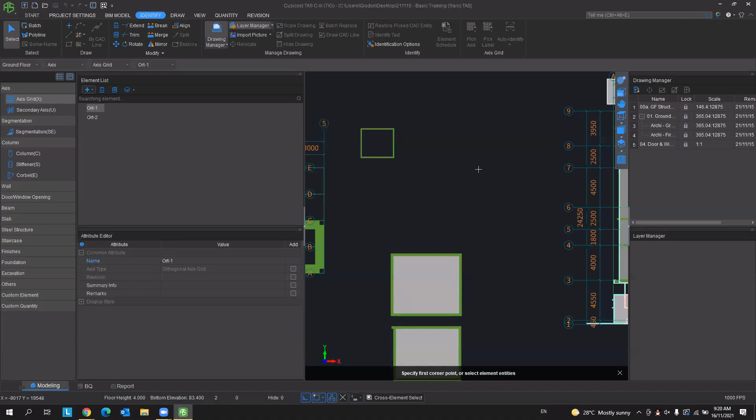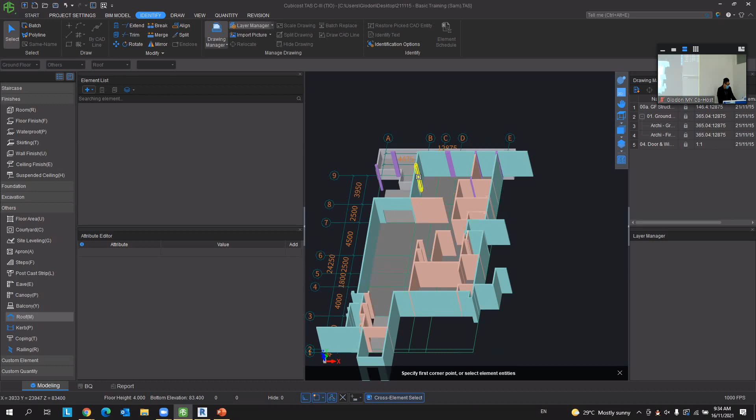So the next item we are going to talk about is our finishes. We're going to talk about finishes, right? So I would like to let you guys know, before that, let me resume the recording.

Recording in progress. So for the finishes from the element tab here, it's actually falls under finishes element. So in the finishes element, you will see there are a few things.

Okay, the first one will be on room. There are some finishes: skirting, wall finishes, floor finishes, and ceiling finishes. I'm going to explain the differences and what we can actually do with them. For the room finishes, I'm going to leave that to the last.

For the floor finishes, you are able to create a horizontal and also a vertical floor finish. For example, something in the toilet, nearby the toilet, we have a drop at the toilet. So this is our vertical finish, and this is our horizontal floor finish. We can actually generate both.

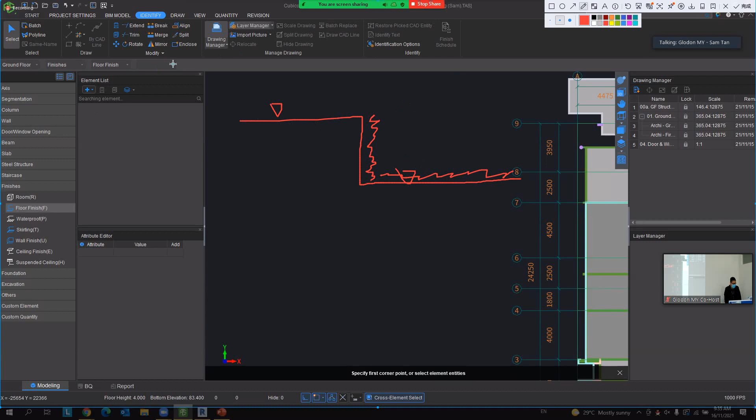For the waterproofing, it's the same case—horizontal waterproofing and also vertical waterproofing. Skirting will be on the skirting only. Wall finishes, also the same. Then we have ceiling finishes and suspended ceiling. Ceiling finishes will be the bare finishes, the finishes attached to the upper floor.

For example, this is the first floor, and this is my ground floor. The ceiling finishes will be the finishes on the upper floor's slab. For the suspended ceiling, it will be something like having a hanger to hang your plasterboard ceiling, for example.

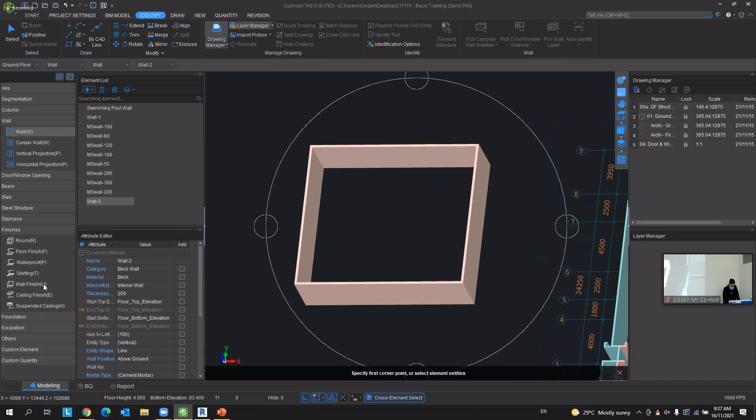So those are individual finishes that we can create and also point to that particular parent entity. For example, let me show you—say if I have a wall with four sides. If I'm using one by one, I create a new finish, for example, I create a plaster.

Don't need to follow me, just let me explain. You can actually create the wall finish, plastering, and then use the point function to point it at each side of the wall. So this is how we can point the finishes, but this is not flexible enough.

Normally we will receive some kind of finishes schedule. If you refer to the training material that I sent to you guys, you will have this Excel file. This Excel file, or even the data in the AutoCAD file or PDF, we can actually identify it. It will be a little bit similar to our door and window schedule.

We will need to identify all the information, and then they will create a room. So what does a room mean? For example, type A bedroom has floor finishes, wall finishes, ceiling finishes, and skirting—what are the finishes that we have for one particular room.

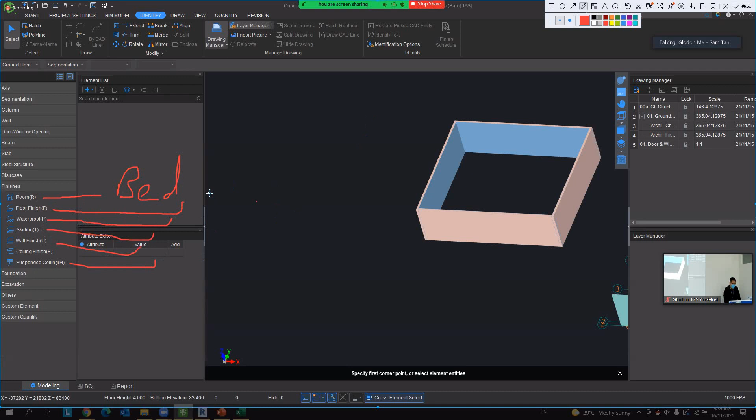Back to the software, in TAS software we actually read it as room. The principle is you're going to create a room, for example bedroom. For that bedroom, I'm going to assign what are the finishes—my floor finishes to the room, is there any waterproofing for that room, my skirting, my wall finishes, and my ceiling finishes. So I have one room associated with other finishes.

Then I'm going to use a point function to point it directly to the enclosed area. Remember, when we're using the point function, we're using enclosed area. So this is the principle of it—by one click, you click on the room within the enclosed area, and all the wall finishes, waterproofing, skirting, and ceiling finishes that we assign to the room will appear for that particular enclosed area.

So you can also do it the flexible way, which is you create the floor finish one by one, point it once, and then create wall finishes and point for four sides of the wall—that will be the manual part. So for today, let us focus on this.

Let us double click on the ARCHI ground floor plan on the drawing manager. The reason I want to call out my drawing is because I want to know what room name I have now. We're going to focus on one particular part, which is the top right hand side—just the wet kitchen, at the moment, for the top right hand side of the plan.

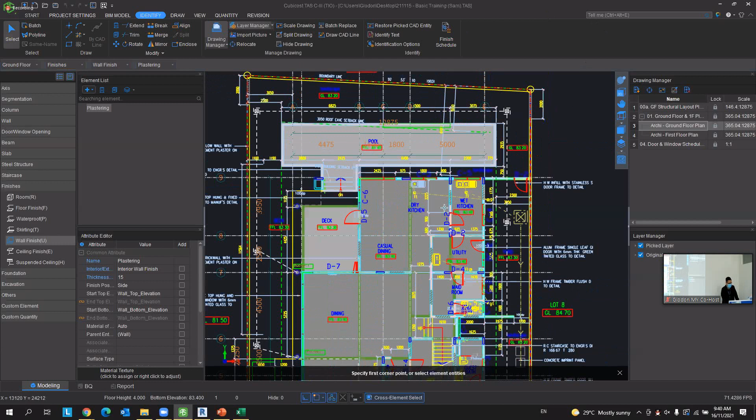Right, so here we go to the room. Okay, make sure we add the room.

Then you will see at the identify tab, I have a finish schedule, and at the draw tab, I also have a finish schedule. For the identify tab, everything is related to the drawing. If the information falls within the drawing, you can use this finish schedule, because if I click on it, it will ask me to select the finish schedule to identify. But currently my finish schedule is in Excel, so I'm not able to use this function.

I need to go to the draw tab, finish schedule. Once you click on it, there will be the identify finish schedule. From this path, you are also able to select your CAD data, but as we are having the data from Excel, I'm going to select import Excel file.

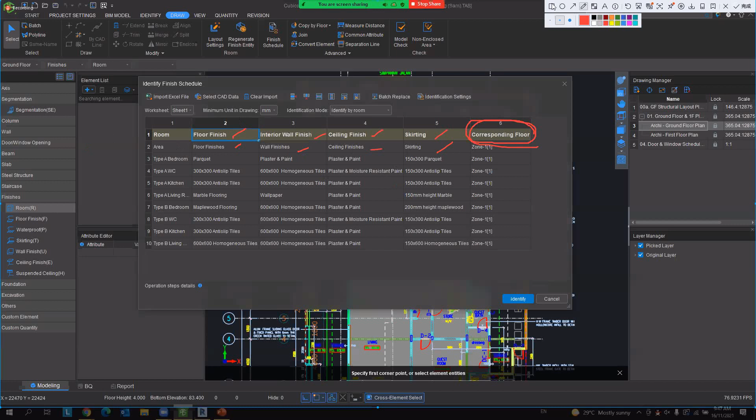Now I'm going to select row number two and delete it, since it's no longer applicable. I will highlight the whole row number two, then right click and delete the row.

So make sure the first row is actually our room, and then we will have a total of 8 rooms identified - we have type A and type B, total 8 rooms. Similar to before, after you click on identify, the 8 rooms will go to the element list.

So we try to click on identify. It will prompt stating that there are 8 rooms, 5 floor finishes, 5 skirting, 3 wall finishes, and 2 ceiling finishes identified. And you'll notice, in the element list, you already have the 8 numbers of the room element. I can just click OK, and I close this identify finish schedule tab.

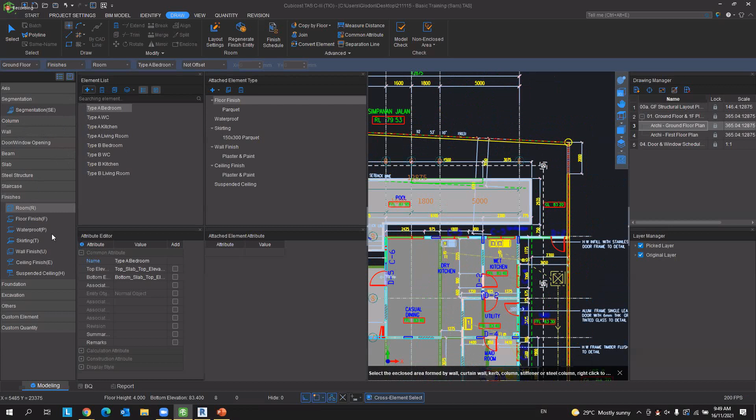Okay, so you already have your room. You will see for room finishes, comparing to yesterday our element. For common elements, for example column, beam, slab, wall, you only have element list and attribute editor. But for room, there will be a little bit more.

Comparing to the other elements, here's how you read it. You will have the element list for the room. Each of the room elements will have their own attribute editor, and also there will be the attached element type, meaning for this particular type A bedroom.

I will have one floor finishes parquet, I have my skirting parquet, I have my wall finishes, and I have my ceiling finishes, plaster and paint. So this is what we call an attached element type.

So all these attached element types will be automatically transmitted to the individual finishes - floor finishes, waterproofing, skirting. It will be automatically transmitted. Later we can actually open and see.

Then each of the finishes here have their own element attribute, the attached element attribute. So take for example, if I click on parquet, for this attached room, I'm having 15mm thickness, and the positioning is actually at the top of it, and the elevation.

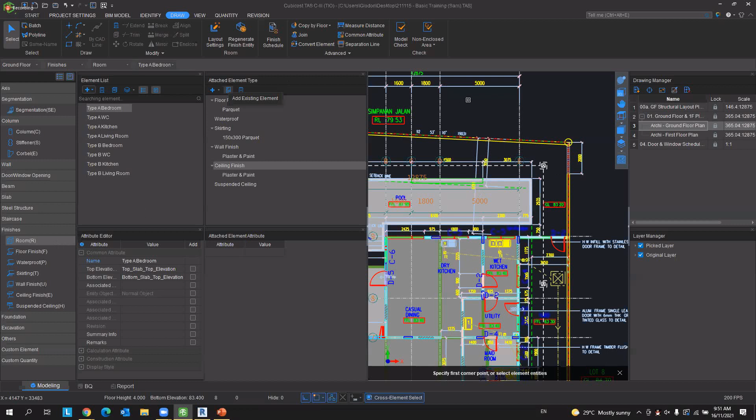Just below the swimming pool, at grid line DE, I'm actually having a wet kitchen. We focus on this wet kitchen. So for this wet kitchen, as we see from 3D, it will be only bare without the finishes currently.

So in this case, I'm going to locate from this room element which one is appropriate for this wet kitchen. From here, I can see you can actually use type A or type B kitchen. So I will need to select type A kitchen first, we click on it.

Then similar principle, you need to use the point function and you will need to select the enclosed area - the enclosed area formed by the wall or the enclosed area formed by the column, or curbs. So make sure I'm having this point function and I can point easily within the particular enclosed area. If you successfully point, you'll see the purple color.

Already, yes, you got it, Brian? Okay, sure. Right, so now I'm in my wet kitchen here. I choose for this type A kitchen, I click on the type A kitchen, then I want to point now. So I just hit the draw tab, this point function, and then you just point it.

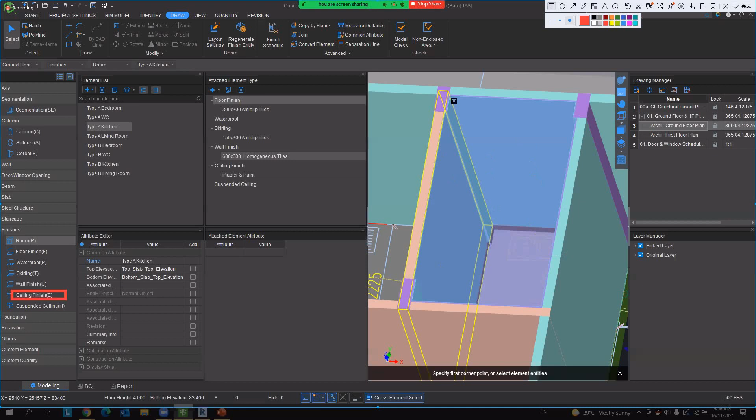Okay, so this is how we can actually point our finishes.

I would like you to focus on the skirting I'm having now. So from here, you were able to see by one click, you're able to get your floor finishes, your skirting, your wall finishes, and the ceiling finish that just now we hide by pressing E, right? One thing I would like you to focus on is the skirting.

So yesterday when I talked about the private and public attribute, for the private attribute, we will need to select the entity first, only then we can do the value adjusting. But in this case, if I'm selecting my skirting, it will be quite troublesome for me to need to select a whole room skirting.

Let's say currently my skirting, I want to change from 150 mm to 500 mm, for example. You can just focus on my screen here. So how can we actually do the changing for that?

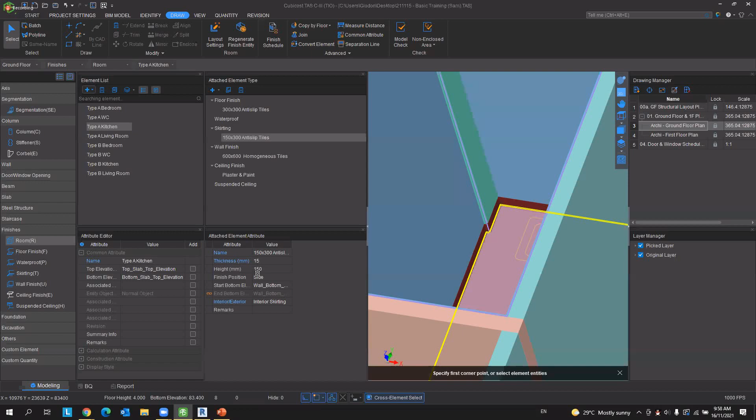So there is another scenario. If you can see from the model here, I'm actually having an opening here. This is the dining and also living. I'm assuming the dining and living share the same finishes, and I want that for the finishes.

So I want it to cover until this particular point, and not go beyond that. I don't want it to go to the casual dining, right? So let me try my luck.

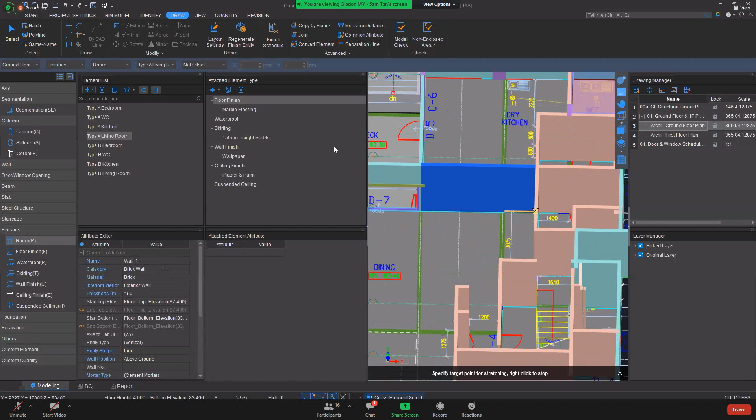So what we can do is use a function called separation line. A separation line is a virtual line, to form - it won't carry any value - it will be forming an enclosed area.

So let us try to draw a separation line here to form an enclosed area. I will just need to select the separation line, and then use line to draw out the straight line to cover it up. I don't need to draw for the whole stretch of it.

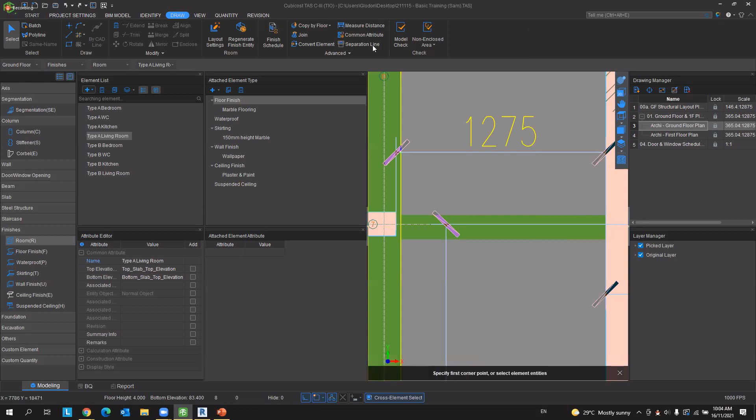Just beside this, click on this separation line here, and click to separation having 3 dots here. Anyone able to get the separation line? Yes.

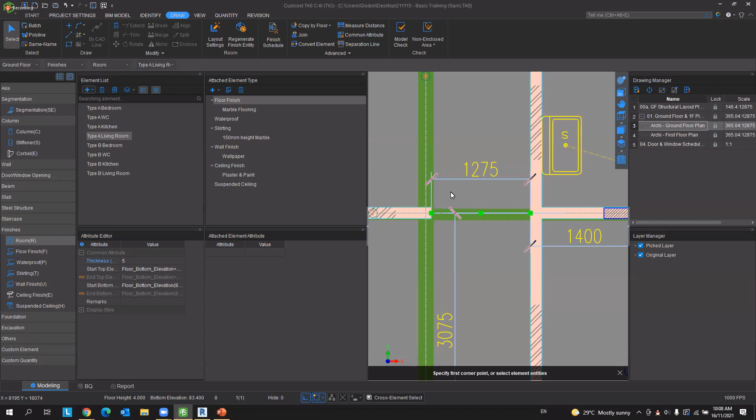Once you create the separation line, the next thing we can just click on the type, living room, click on point, and then you just point it, and then you see whether it is the thing that we want.

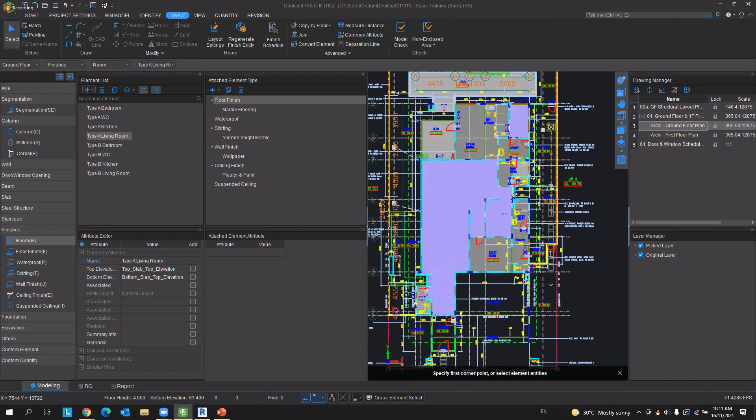External finishes, in fact we have so many walls for the external wall finishes. So we can actually close all the layers, it's actually confusing, right? So if you are doing it manually, you create the wall finishes and then you point it one by one, walls, also can be done.

But you can think out of the box, which is later I'm going to use back the same function, separation line, but I'm not going to use line. I'm going to use the rectangle function, and draw the whole separation line. Then I'm going to create a room for the external finishes, and use point to point the enclosed area so that all my external wall will attach with my external wall finishes. There will be a concept of that.

I explain again. So just now for the kitchen, we point at the enclosed area, we point at this any point. So my finishes, it will go along to the wall, go to the column, go for the ceiling, right? It's actually need to have one condition, which is enclosed area.

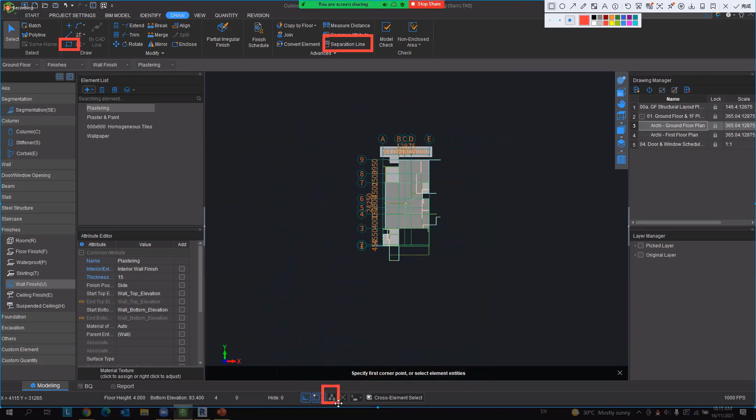So we're going to use the function of separation line as well with the rectangle function, but we need to open the random point. Only then can we actually draw it later on. I'm going to draw the whole big piece that covers the whole boundary of the building, to form this as an enclosed area, behind the condition enclosed area. Make sure it's actually in the enclosed area.

Then in my room, I'm going to create a room for the external wall finishes only. Then I'm going to use the point function to point it at any point, so that later on all the external walls will be attached to the external wall finishes.

So we try together, everyone. The first step, I'm going to create the room finishes first. I'm going to create a new room. You go to the room, and then click on the add button, add a room. By default it's Room -1.

We just rename it to become external wall finishes. There will be the external wall finishes created. The next thing, I'm going to create a wall finish here.

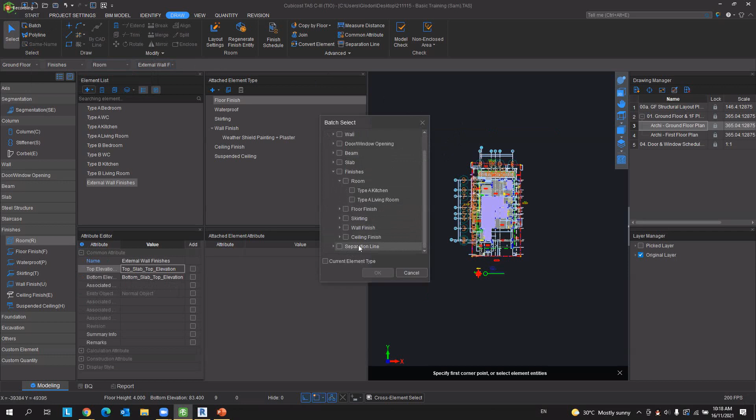So now all the separation lines are being selected, right? You can see the attribute editor is actually referring to the separation line. Currently it's 5mm, too small, you cannot see, so I'll just change it to 50mm perhaps. Then you press escape, and you will see a golden line.

So you know this is our separation line, actually forming an enclosed area for me to point. So this is the enclosed area. Now we can go to the room function, select external wall finishes, go to the draw tab, click on the point function, and then just point it freely within the enclosed area.

After I point it, you will see, some of you might have the gap check. There will be a gap check prompt stating for you that this is a notification that we have a few gaps that need to be checked. As you can see, the first one I actually have two.

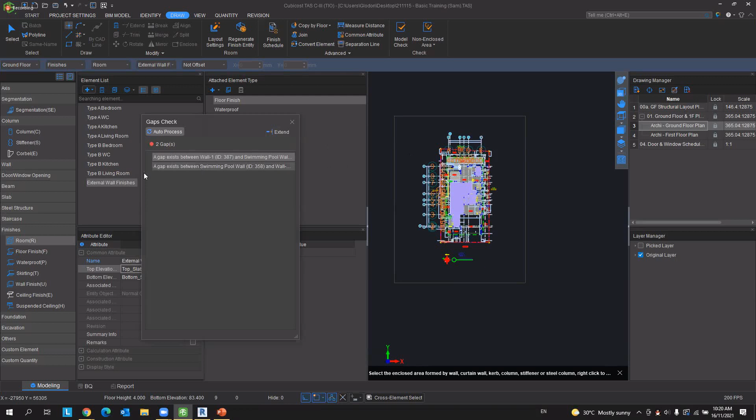If you're not sure what that means, you can just double click on the particular thing. You can see, it's actually my swimming pool wall and my brick wall having a problem. So I can either click on extend or auto process it. After I auto process, in total, I just click on OK.

So then I just do back the same method, the same steps: room, external wall finishes, click on the point, and then I point it. So is anyone getting a big piece of the purple color?

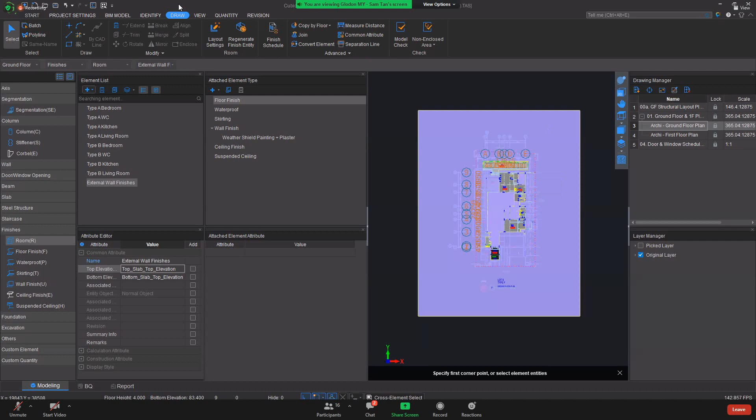Right. Yep, sure. One moment, let me repeat again.

So after you create the separation line, we are forming an enclosed area outside, right? So if you attempt to click on the external wall finishes, and then click on the point function, let's say I point it, there will be a gap check. It will ask you to check the gap that is not forming the enclosed area.

So normally this happens at these particular two locations here. If you don't know, you can just double click on it. You can see this is the first part and this is the second part. Normally you can just click on auto process, and it will be processed, 2 gaps in total.

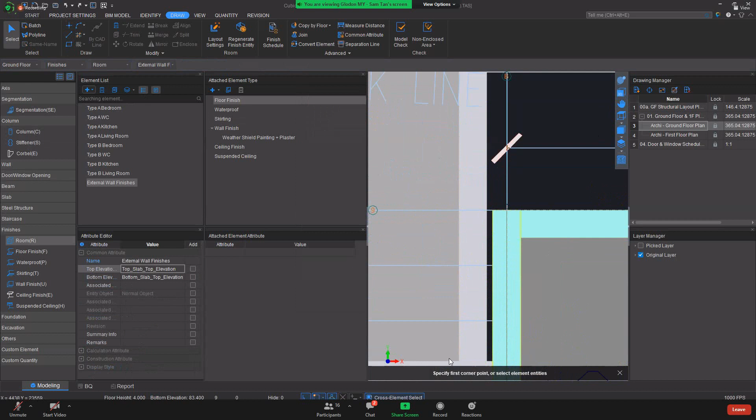Right, if you've already processed it, let's say this one, if you cannot auto process it, I would recommend you to prolong this wall. You can prolong this wall, extend it, you can just extend the wall.

And then just click on the room finishes again, you point it back again. So you're able to get the room finishes generated. So this green purple color is actually not the finishes color, it's actually indicating the room finishes.

So as you can see, this one, you will have a purple color line box indicating the room coverage. So with this you can actually check your external wall, whether all the wall actually has the external wall finishes.

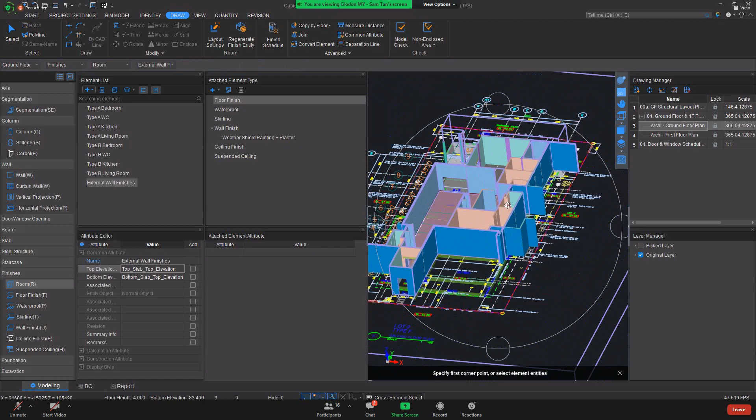So this is how we can actually do it for one floor. For ground floor, for structural elements: column, beam, slab, RC wall, masonry wall, door and window opening. With the opening we have the lintel. Then with the finishes we need to have an enclosed area. For the finishes, we use the room function to point it, or if you want to point it manually one by one, also can, it depends on you. If it's a condominium type of project, you can just do it one by one, or you can just do it using the room function. And for the external finishes, we use a trick, which is create a separation line to form an enclosed area outside the box.

Okay, and then we just click on the external wall finish room to point it within the enclosed area. So this is the overall for the ground floor.

Okay, so I noticed we actually still having a staircase. I'm going to leave it to tomorrow morning session before our evaluation.

So for the ground floor, still remember yesterday I mentioned to you guys on the floor settings, the number of typical floor? That I would not recommend you guys to use it, because you don't have the flexibility to change certain floors' elements.

So let's say you have a condominium, sharing the same layout, same finishes, same structure to my first floor. How can I actually copy everything back to my first floor, as currently everything I have is in ground floor? So we'll have an assumption that my first floor is actually identical to my ground floor. How am I going to do so?

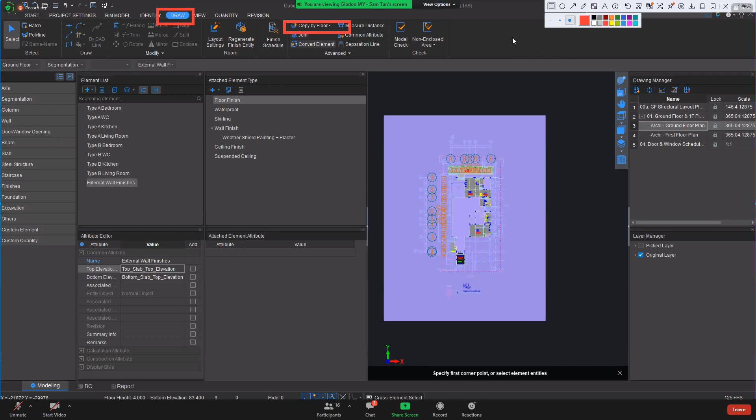If you refer to the draw tab, you will see there's a function copy by floor. For this copy by floor, there will be copy to other floor and copy from other floor. Remember, currently I have the model in my ground floor. If I am at ground floor, I will need to choose copy to other floor. It works both ways.

Or if from the navigation tab you choose the first floor first, and in fact first floor you don't have anything, you don't have any model now, right? So in this case, if you're at first floor and want to copy the model from ground floor, then you need to select copy from other floor. We work both ways, vice versa.

Okay, so I will stick back to my ground floor, everyone stick back to the ground floor. You can just turn off all the layers for the drawings because it's actually a little bit confusing. So I have the full model here - the column, beam, wall, slab, the RC wall, masonry wall, everything. Now I'm going to copy it.

So to copy it, go to the draw tab, then copy by floor. We're going to choose copy to other floor.

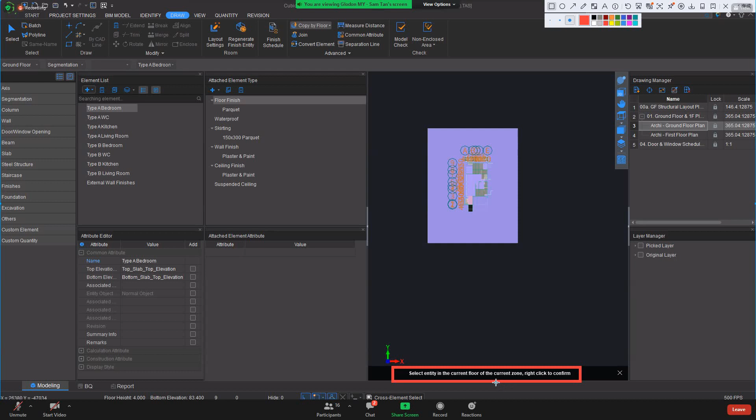After you copy it, there will be a status bar at the below: select the entity in the current floor of the current zone, and then you right click to confirm. In this case, you can actually open the cross element select, click on it, and select the whole thing - just left click and drag everything, then right click to confirm.

You'll be coming to an interface: copy selected entity to other floor. Which floor do you want to copy to? I want to copy to my first floor, so I will just blue tick my first floor and then click on OK. After you click OK, there will be a prompt stating that the entity copy succeeds. Click on OK.

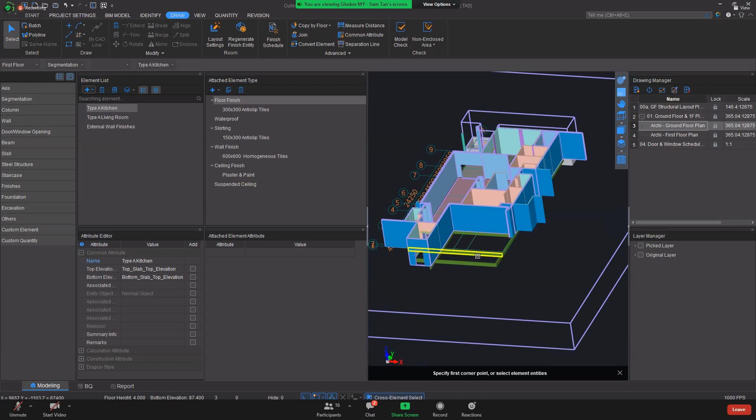So we're just going to check whether it actually copied correctly or not. I go from the navigation to my first floor - there you go, you are having your first floor element. For training purposes, don't think about the logical way, because normally we won't have any car porch at the first floor. We just practice on how we can actually copy to my first floor.

And in case you wonder, there are some things that we do not need, for example the swimming pool wall and swimming pool slab at the first floor. For this case, you can use the batch function to select the swimming pool wall and also select the swimming pool slab, which I do not need in my first floor, and then press delete.

So I can go to the batch, similar case, go to the wall, select the swimming pool wall. For slab, select the swimming pool slab, click on OK, and then the swimming pool element is selected, and then I just press delete.

Okay, I just press delete, and then you can make the modification. So those are the things we can actually do for modification. As I said, yesterday if I amend one thing on the ground floor and first floor, if I delete the swimming pool, it will be deleted for the ground floor as well, right?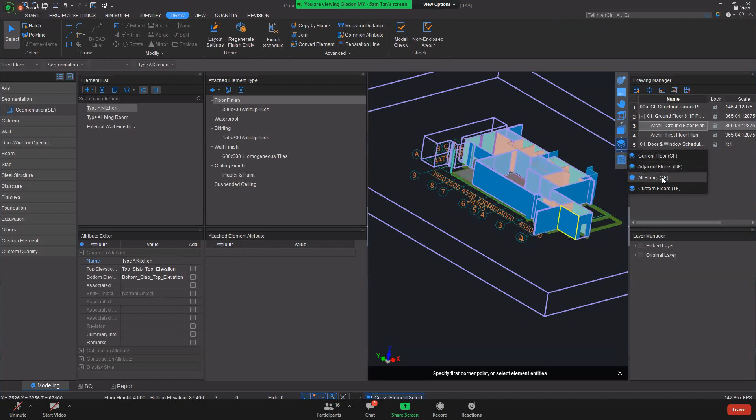So by using this method, I try to open all my floors. You can try to open all floors from here, the second last button, for the view tab. There's a drop down. You can actually view the current floor, adjacent floor, or we can view all floors. Let's try to view all floors.

So when you view all floors, these are the flexibility we're actually providing. At my first floor, I delete my swimming pool wall and swimming pool slab, and on my ground floor, I still have this element remaining, which is correct. If you are using the floor settings function instead, if you delete the swimming pool wall and slab, it will be deleted automatically on both the ground floor and first floor.

So you can see this is the first floor and this is the ground floor. I'm selecting my first floor. All my axis grid and the drawing is actually located at my first floor. You can see the axis grid here. So I'll go back to normal.

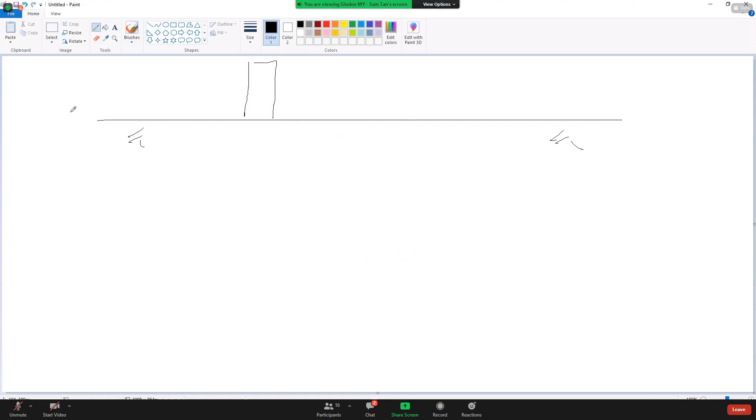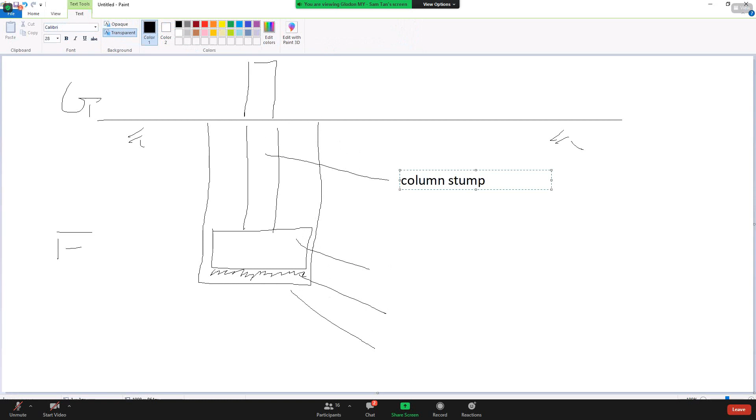Coming back, we're going to move to our foundation floor, and in the foundation floor we will have a few elements. The first one, this is my ground floor, where I have my column, am I right? This is my first floor, so my first floor and my foundation floor will have my column stump, and I have my pile cap. Beneath the pile cap, I have my lean concrete, my blinding, and then I will have my excavation. So it will be 1, 2, 3, 4 elements. I will have 4 elements. So this is the column stump.

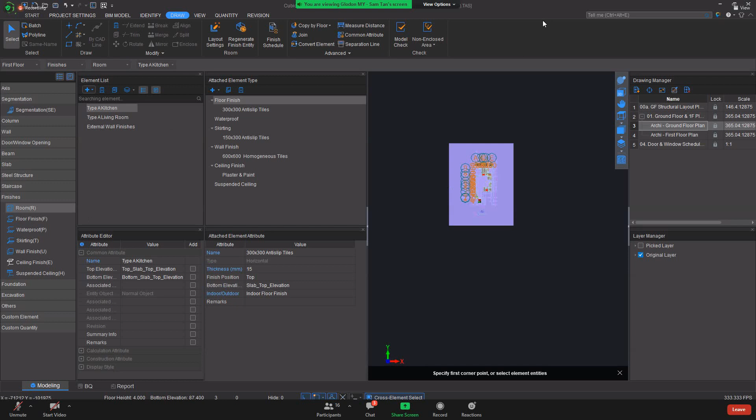So we have a question from Samuel. When copying the other floors, the element list also copies together, but I notice the room element list is empty. Why, and how to handle this? So for the first question, if you refer to your ground floor, yes, in fact we have 1, 2, 3 — we actually have 9 rooms, but we only utilize 3 room elements. So when you copy up, when you copy the whole model, it will only copy the elements that are actually used, which is these 3 elements only. Only these 3 elements are being used, so we copy that.

If you want to copy the whole thing to your first floor as well, you can control-alt, right click, and there will be a copy to other floor option, and that will copy the elements — only the element list gets copied, not the model. Let me copy as an example: I will copy the 9 rooms to the other floors, copying to my first floor. So the element is being copied to the first floor. But if your model has a few rooms already, the 3 room elements will automatically be copied.

For the foundation floors, now we just move to the navigation tab. We move to the foundation floor. Okay, navigation tab, we move to the foundation floor.

So in the foundation floor, as we are having now, if you refer to the structural drawing, we actually have what we call pile cap layout. We actually have a pile cap details, 04 pile cap details, with the pile cap indication layout and also the details here that we have.

So we are going to similar steps. We are going to import our pile cap details in the drawing manager. Click on it, and then we can actually find the drawings - the pile cap layout, 04 pile cap details. We double click on it, the pile cap details.

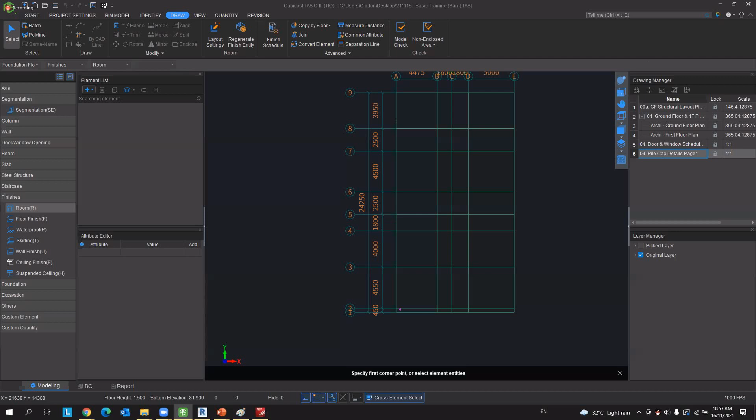So in this case, anyone can tell me, do I need to split the drawing? Hannah, how you think? Do I need to split the drawing for this pile cap detail? No, okay right? So yes, we do not need to split the drawing because we only have one layout from this drawing. So in this case, we can just skip the split function.

We go to the relocate, left click on the relocate button, find the 9A intersection, and then you just relocate it back to the axis grid. So in this case, you're able to get the pile cap layout connected to our axis grid.

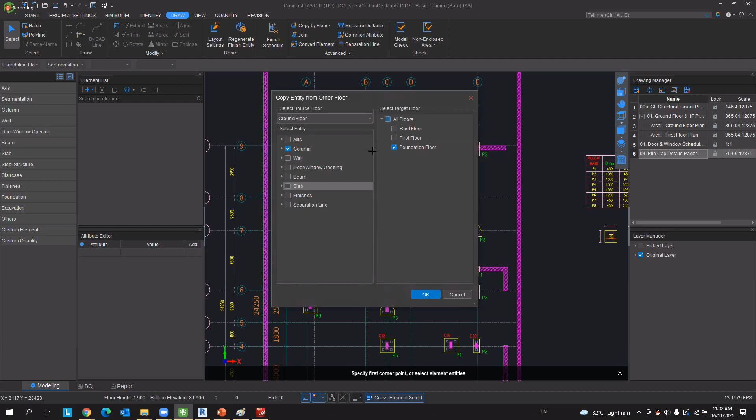So I repeat again. Once you relocate the axis grid, we know that my ground floor column will be a continuation to my foundation floor. So in this case, I'm going to use the function copy by floor, and I'm in foundation floor, I'm going to copy from other floor.

There are a few things we need to make sure. First, the source of the floor is ground floor. Second, I only need to select my column, others I deselect. Foundation column only, and my target will be my foundation floor, and I click on OK, and then OK.

So yes, for the column, perhaps we have few column only currently, because in our ground floor, it's also have 1, 2, 3, 4 - we have 6, I have 7 columns only now. So as you can see now, all the column is actually being copied to my foundation, and my foundation column is having 1.5 meter high. All the column is 1.5 meter, and you will see comparing to ground floor, a little bit shorter.

So this is how we can actually copy our column. We make full use of it. We are not going to create and do it one by one. So we can just copy from my ground floor to my foundation floor, and then from the layout, you can see those are the indication of my column, and yes, it's actually in the same place in the right coordination by the help of our axis grid line.

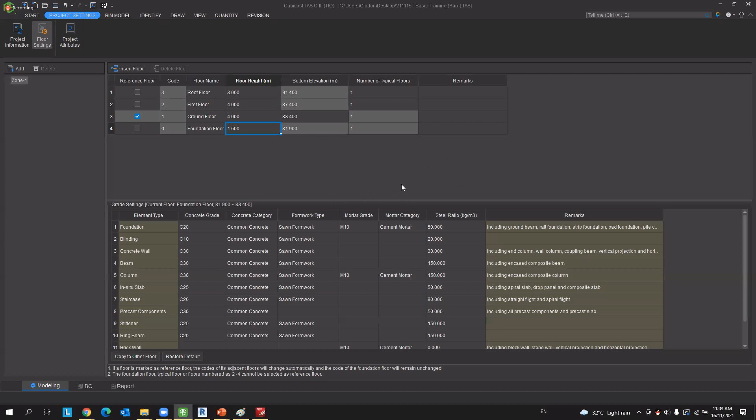Okay, so from here, my column is complete. So the next item will be on pile cap.

The next will be on pile cap, right? So for the pile cap, it's also the same. Everything in the foundation floor will fall under this foundation. In the foundation, you have pile cap, you have the blinding pad foundation. For this one, I'm going to choose the pile cap. For pile cap also, you will have a few selections: rectangular pile cap, irregular pile cap, parametric pile cap, and custom pile cap.

Okay, those pile caps, this is the parametric one. So we try to practice on the auto identify. Not sure whether the drawing quality is good or not, but in this PDF drawing, I will just stick to the pile cap element.

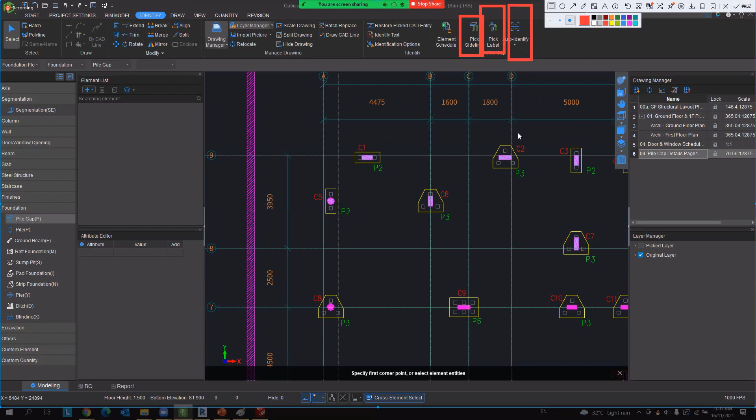Back to the identify tab. Everything related to drawing is the identify tab. 3 simple steps, same as my column: pick side line, pick label, and auto identify. The side line will be on this yellow color line. First, side line, the yellow color line. Label will be on this green color font, and then you just click on auto identify.

Right, so we try it ourselves. First, left click on pick side line, then left click on the yellow color line, and right click to confirm. Second step, left click on pick label, left click on the P2 font, the green color font, and right click to confirm. The next step will be auto identify.

It will generate a total of 31 pile caps identified in total, right?

So in this case, this one is actually our P2. For example, the first one, after I identify it, the first one is actually unnamed. In this case, the quality of the drawing is still not up to standard, so it will generate the element list without the name. But if you want to know the name, we can just right click and quick find entity, and this is actually our P2. So in this case, perhaps you can just change the name to become P2.

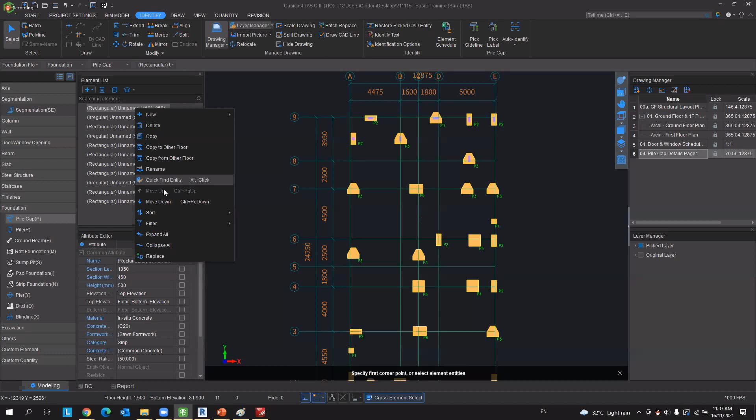And the second part, let me see this one - and this is our P3. In fact, you see the P2, we still have another P2 yet. So this is the thing that is a little bit troublesome when we deal with this kind of drawings.

Right, if you're doing it one by one, for example, let me show this one. For this shape, you can actually use the function of irregular. Similarly, I can use it, I can select the section. I can directly select this thing and click on OK. So I have this created manually, and I can point it freely using F4. So this is also one of the methods for us to do.

Okay, there'll be one of the methods to do also. So for pile cap, you have auto identify, also the same, or we use the manual method. The manual method will be the one I just mentioned - we create one by one, you use the point function to point.

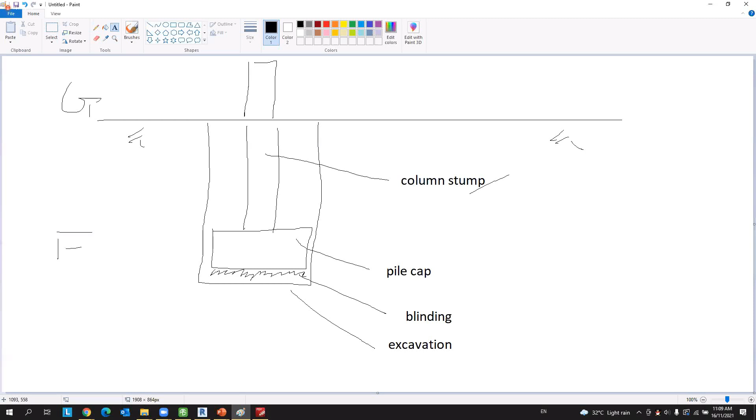The next one will be on blinding. Blinding will be a little bit similar to our lintel. So for the blinding, for example, the lintel yesterday - when we have our door and window, they will generate, they will auto arrange a lintel, right? So for the blinding as well.

Okay, the name, we can just put it lean concrete. The thickness, let's say I put it maybe 75mm. Okay, I put it 75mm. Make sure blinding, lean con, I put 75mm. Okay, the name.

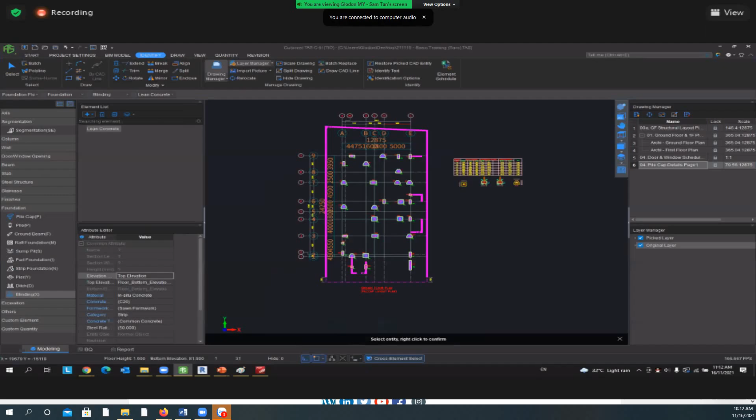Recording in progress. The whole building, all the parts are being selected, and then we just right click to confirm. It will come to an interface.

Please input the extension. Let's say from the layout plan, this is your pile cap. If you set a certain value, let's say 100, it will be a 100 extension throughout the edges of the pile cap. In this case, you guys can just proceed with 0. I'll make it 100 to let you see the differences. If you put it at 0, you won't see anything.

But I'm actually putting 100, so I have the protrude part. You can actually see on your 3D, just beneath the pile cap, your blinding will be generated up, and you will have a pile cap being generated up.

Anyone able to get the blinding? If you are able to get it, comment me a blinding comment, let me know. All right, blinding, okay.

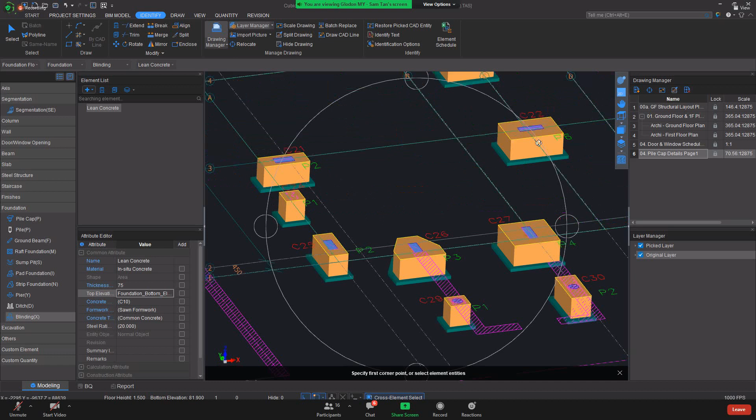Make sure for the blinding, the function we can use is auto arrange, similar to door window opening. If there is an opening, there will be a lintel. If there is a pile cap or any foundation, there will be a blinding auto arranged on it. So the extension, whether or not you want to put it, will govern the differences in terms of excavation quantity.

For the excavation, for example, as you can see, it will take the full width, the full width for the extension taking part. So in this case, you will have the extension, and you will have the excavation to cover the blinding.

Everyone able to get the blinding, right? There will be the blinding part, and there will be our blinding method to auto generate it.

So for the next one, it will be on the excavation. We actually can stick back to the blinding. You will see in the draw tab, we have a function of auto generate excavation, meaning I auto generate excavation by the blinding mode, if there is a blinding.

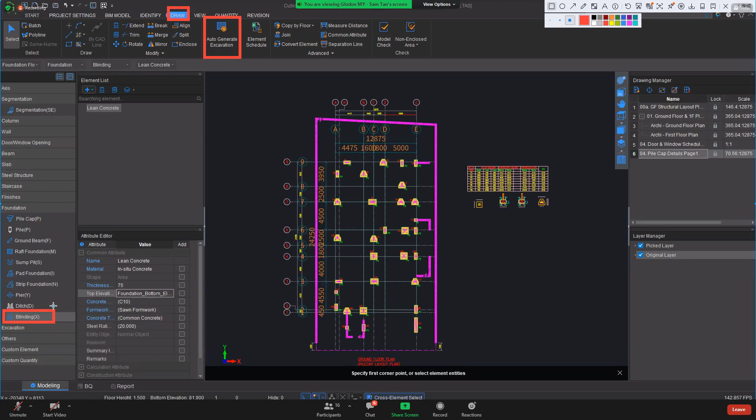A little bit of clarification: in the blinding, you will see auto generate excavation. In the pile cap, you also will see auto generate excavation. So you have to make sure if you are at pile cap.

Let's say I'm drawing a section. This is your pile cap and you actually have your blinding underneath. If you're at pile cap to generate the auto generate excavation, the excavation will take place from here until beneath your pile cap only. Meaning your height of excavation will not be counting the blinding thickness, the 75mm. That means your volume will be lesser, right? So this is not the thing that we want.

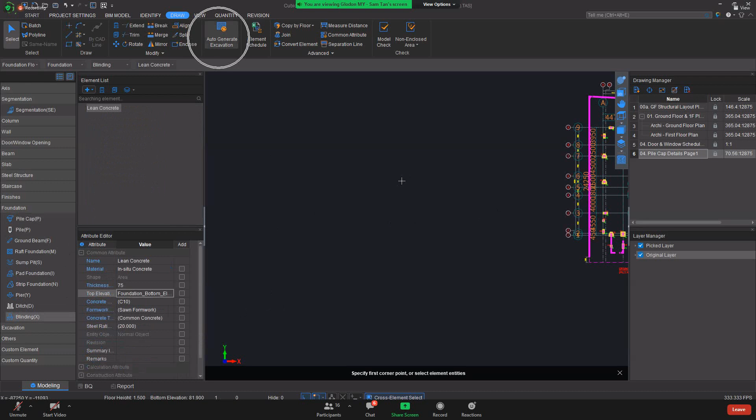If you want without the blinding, yes, you can use the pile cap. Because some of the quantity we measure is without blinding, but most of it we actually include the blinding thickness. So make sure in the blinding we choose this auto generate excavation. You also can create the excavation element list one by one, but we have a function to directly auto generate excavation based on the blinding. So at the blinding, we click on the auto generate excavation.

We click on the auto generate excavation. There will be three functions. The first is the pit excavation.

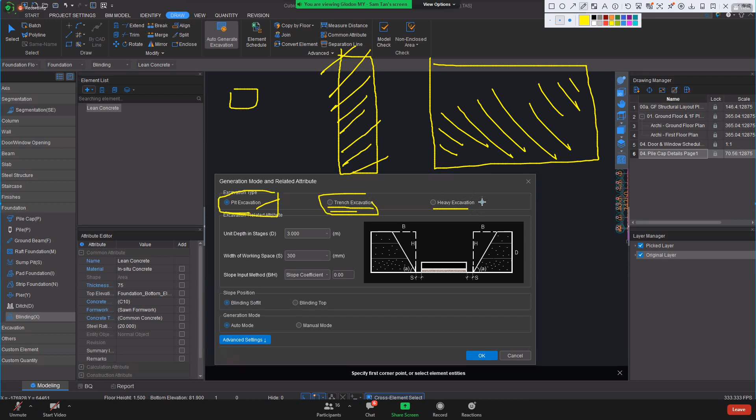In our pile cap, we will be focusing on this pit excavation, and all the settings are quite similar. As you can see, this one is also everything related to our working space and also the sloping.

One moment, let me open that. Yeah.

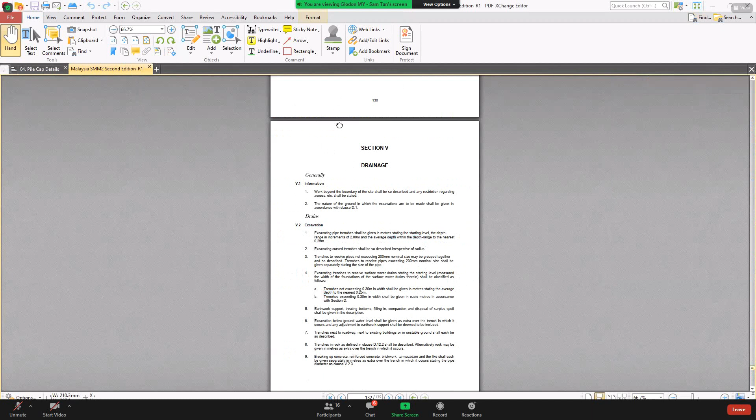Okay, so section D is actually our excavation element. So you will have this depth classification that we need to quantify the quantity from: maximum depth not exceeding 0.25 to 1 meter, 2 meter, 4 meter, and 2 meter thereafter.

Right, so we actually have this depth classification. Meaning to say, later on when we generate our quantity, it will be segregated out. For example, if there's a total 4 meter depth, the volume of it could be, for example, 2 meter cube, 2 meter cube, 3 meter cube, and 2 meter cube, so the total is 9 meter cube. But we need to segregate into this particular form.

The reason why we need to have the depth classification is when we excavate deeper, there will be more temporary retaining structure we need to incur, and also some working space to meet anything, right? So those are the things we actually need to take care of. It's reflected in our cost indirectly, to our rate indirectly, right?

So in this case, a little bit of explanation. We have the depth classifications by 0.25, 1, 2, 4, right?

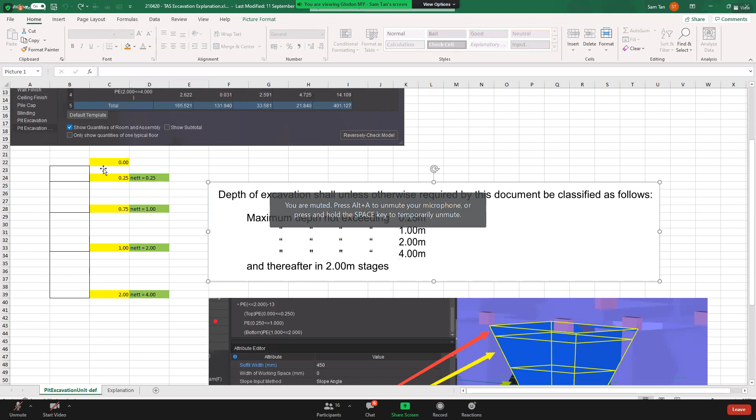So in our software, we are not actually inserting 0.25, 1, 2, 4 directly. We actually need to insert 0.25, then 0.75 to become a cumulative of 1 meter. 1 plus 1 will become 2, 2 to 4, and then that's the 2 meter. So it will be in this scenario.

So we need to say 0 to 0.25 becomes 0.25 net. Then 0.75 becomes net 1 meter, net 2 meter, 4 meter, and 2 meter thereafter. So the software is designed in this way. We need to do a little bit of subtraction. So it's not directly input as 0.25, 1, 2, 4.

We need to put in 0.25, and then the balance of 1 minus 0.25 is 0.75. 2 minus 1 is 1, this is 2. So ultimately you will have 0.25, 0.75, 1, 2, 4 thereafter. I'm going to explain this one later.

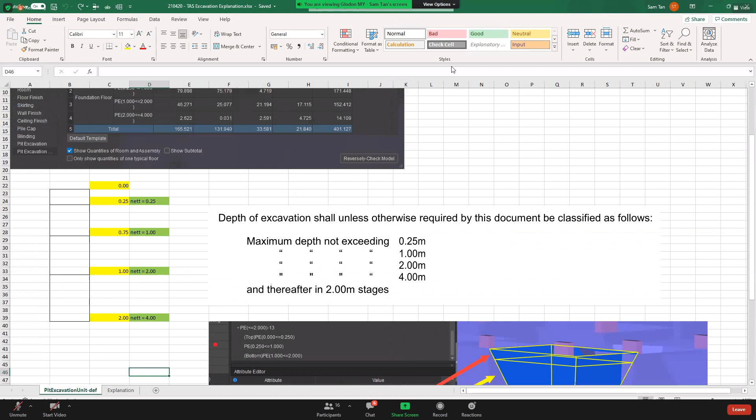So for the excavation, it will generate two quantities for you: one is pit excavation, and one is pit excavation unit. So we need to say, if we change, if we insert this particular information, later on when we get the quantity, I will get the quantity from this range.

So this 36, 79, 46, and 2.622, I will get 165 meter cube. Right, so from here...

We also will have this classification standard of depth. This classification standard of depth is also actually the same as our SMM2. The difference is it will only be categorized to that particular pit's excavation depth - is it more than 2 to less than 4? It will only be noted in this particular format, and the total is actually similar, 165.

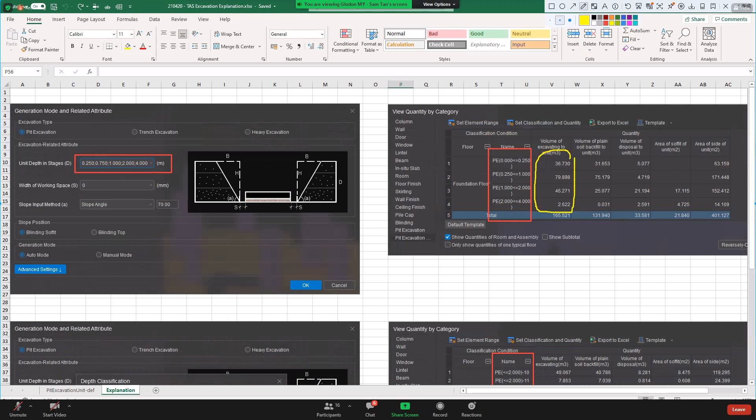But normally when we want to derive our quantity to the BQ, we need to use this format of the volume. We segregate it out to the depth stage. So with that, the unit depth in stage, we are going to input in.

One of the things we are going to input is actually 0.25 and then semicolon. It will be in this format: 0.25 semicolon, 0.75 semicolon, 1 semicolon, 2, thereafter. So you can just insert into the unit depth in stage - you can just refer to the notepad I'm inserting for you: 0.25, 0.75, 1, 2, and thereafter 2 meter every.

All right, okay, nice. So the next one will be on width of working space. So in this case, as our training for these 3 days is actually on contractor side...

So for contractor, you also need to determine what is the purpose for you to quantify out excavation. Let's say for the main claim, we note that the main claim has the preamble with the consultant - all that working space needs to be rate inclusive. Therefore our quantity need not include the working space. So if your purpose is to do your main claim, to submit to your consultant, then in this working space, I need to put 0.

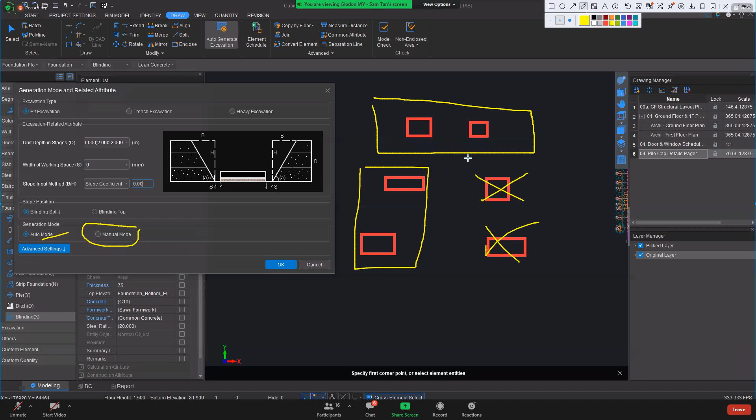When you use manual mode, the situation is perhaps the existing ground level is actually different comparing to the other pile caps - the topography will be different. So you have a different contour, a different existing ground level to start your excavation.

The next one, the advanced settings - this classification standard of the depth, by default 0.25, 1, 2, 4. We're not going to change this 0.25, 0.75. This is only to show you that by using the range, you get the volume of it. So we can just stick to 0.25, 1, 2, 4, and I just click on OK. Make sure you already set it accordingly - working space I put 0, slope 0, auto mode - and I click on OK.

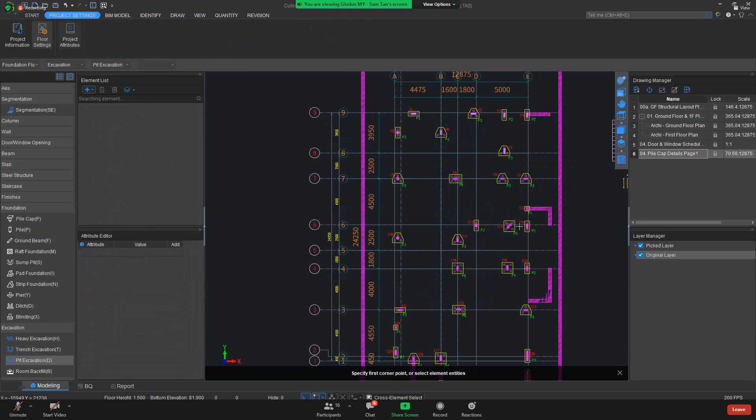You can try to see your 3D, see whether your excavation is being generated nicely.

So I have another situation - if you refer to my screen and see my 3D, is anyone having the same problem as mine? No? Okay, yes? Okay, so how about our friends from the Zoom - anyone having the same problem as mine, something like KLCC? No, all right. Aini, yes, okay. So we have Aini and also Brian having this issue. So what is this issue actually representing?

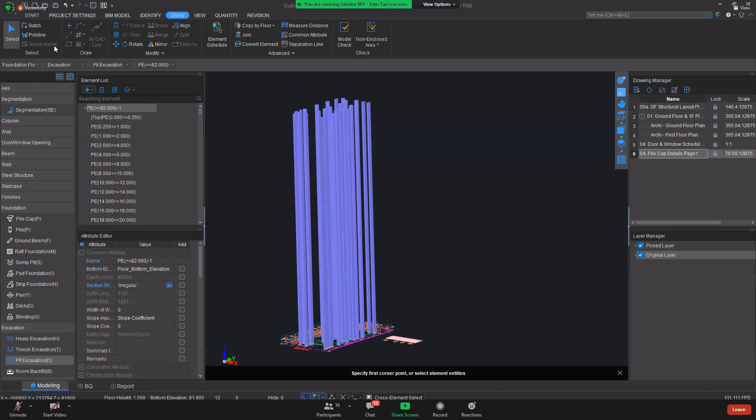Let me come to here. Still remember our project setting, our floor settings - the bottom elevation of our ground floor is actually 83.4. And our project information, if you are having the KLCC type of excavation same as mine, in our ground elevation it's put at 0. What it meant is, as I mentioned, this ground elevation is the starting point of our excavation. So from the software, it will read that yes, we actually have our pile cap, our blinding - the soffit of the blinding is actually at 81.9. So I'm currently at this.

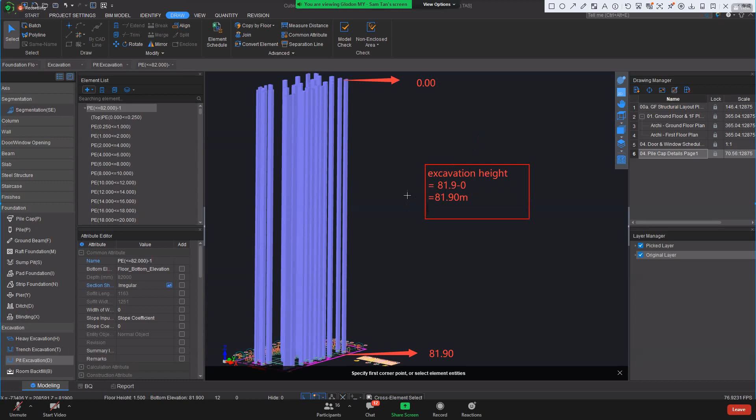To make it become normal, first thing, we go back to 2D. Go to the batch, and then select for all excavation. I just select all excavation, click OK, and then I just press delete.

After you press delete, at your pit excavation element list, we need to delete everything. We try to delete everything, we just keep on deleting the whole thing, until the element list is empty. In pit excavation, make the element list empty. After you delete, everything is clear on the element list.

We go back to the project settings. We need to change back the ground elevation. The ground elevation, if I still remember, is actually 83.4. Remember everyone, the only thing in project information that will take effect on quantity is this ground elevation, and this ground elevation is our starting point of excavation. And this elevation is correlated to our floor settings here.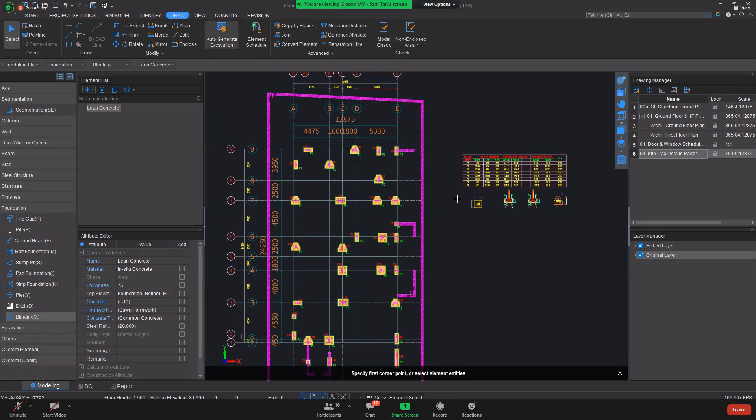So after we change it to become 83.2, back to the blinding, we do the same step again. Back to the blinding, in the blinding, auto generate excavation. Make sure everything is correct. I just click OK, and then you try to see your 3D again.

So in this case, the excavation is actually being generated starting from 83.2.

So for each of the excavation, they will have an excavation unit. So these are the things that we just created: the PE, the first one 0 to 0.25, 0.25 to 1 meter, and then 1 to 2 meter. So we will have this in stage, the quantity in stage. It will quantify out the PE, quantity in stage.

So in that case, we try to calculate to see what are the things that we actually achieved from yesterday until today. So from here, similarly, go to quantity, click on calculate, and we try to calculate all floors, and open the view quantity by category.

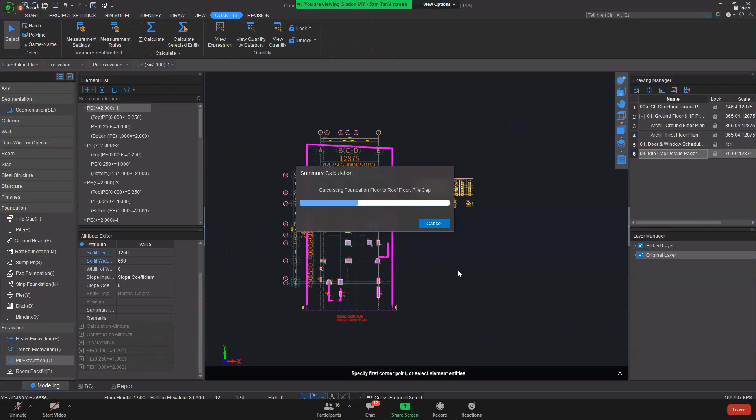Since yesterday we only were able to get the column. So from yesterday we actually have our wall, door, lintel, beam, slab, room, the finishes, parquet, blinding, and the pit excavation unit.

So each of the information here, you can actually export to Excel, and you can actually set the classification and quantity as you wish for the name, for all other thickness, for example, or your own preference.

So excavation, as you can see, it generates into two. First is this one, pit excavation, only having more than two, less than two. We have items from 1 until 12, total 62 meter cube.

But what I want to know is actually by using the depth, the staging. So as I see from here, I have staging for 0.0 to 0.25, 0.25 to 1 meter, and 1 to 2 meter. So I have also the same quantity, 62.886, it's actually the same as this one, the pit excavation. But the quantity that I want is not this one, I want it to become the staging.

So those are the quantities that I can have, and you can export to Excel.

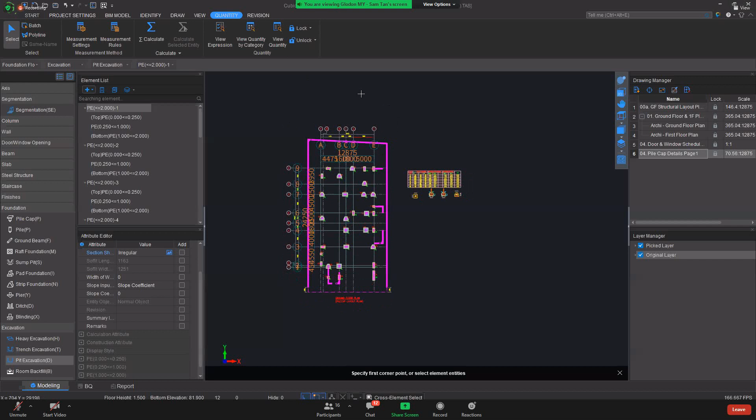So with that, a little bit of additional information, this one is actually not taught in basic training. Normally, still remember yesterday when I'm showing you, let's say you have a horizontal element and a vertical element, for example this is your column and this is your beam. Vertical element will take precedence.

So this overlapping part, column will take precedence, and beam will be deducted. Let's say in some scenario you want beam to take full volume, and column to be deducted from the column volume. How can we actually do the settings? In the quantity tab, we actually have two things, this measurement method. Whatever we set, whatever we have in SMM2 is actually in measurement settings.

Okay, so don't get confused. For measurement SMM2 rules, I will need to refer to the rules. Actually it's in measurement settings. Measurement rules is the place for you to set, for example, in the overlapping part, do you want to do any deduction?

For this measurement settings, for example, I click on it, you will see for each element the setting you can set. If you didn't do any settings here, it's actually preset as per SMM2, so we don't need to do any settings. For example, the starting height is 3.5 by default. If you have any amendment on SMM2, any supplement agreement to amend SMM2, you can actually change it here.

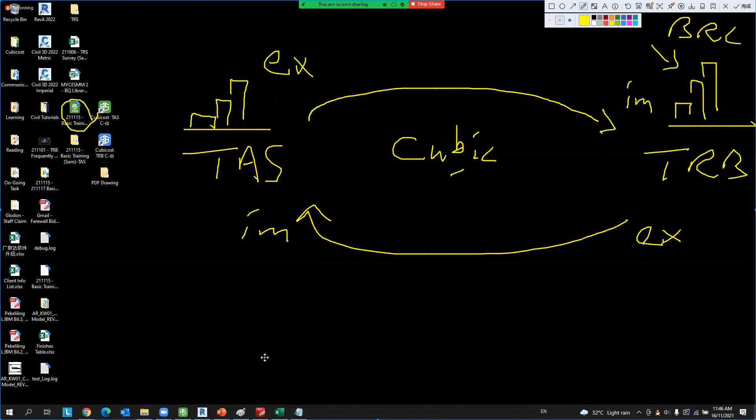You can click on the BIM model, everyone - click on the BIM model, and then you will see there is a cubic model tab here. So in this, we are going to export the model. In the export model, they have two functions: export model by floor and export model by entity.

Export model by floor - you will be selecting all floors or any typical floor you want to select, and you can just copy everything and export it. Export model by entity means you will have your selection - for example, I will make a few changes, I just select these few entities and import to TRB to make changes. So from this, we actually need to use this export model by floor.

At BIM model, select export model by floor. Select the whole project from the drop down, and then click on OK.

By default, it will have a file name same as my TAS file name. That's the data that I prepare, and the file format is actually .cubic. I click on save.

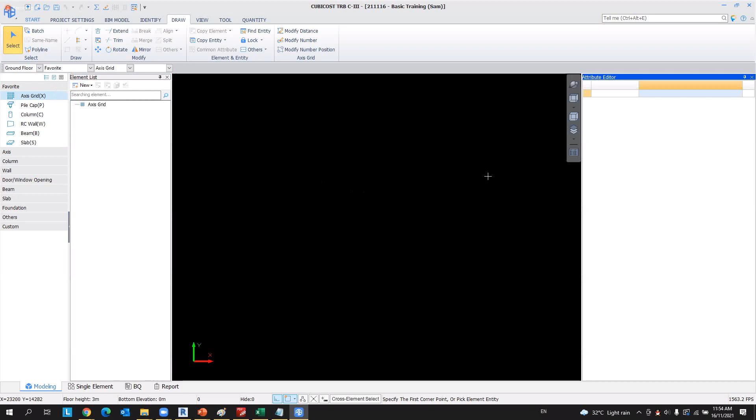So there will be a slight difference compared to TAS. In TAS, what we are having is this is my element list, and below is actually my attribute editor. But in TRB, it will be a little bit different. The attribute editor is just at the right-hand side.

And opening your drawing manager is actually upside down, it's changing the positioning. In TAS, drawing manager is at the right-hand side. So this is the differences in terms of the interface.

So we're going to import our model first. We do similar things, we go back to the BIM model. Everyone, we go back to the BIM model.

Just now in TAS we export from TAS, and then in TRB we're going to import the model. In BIM model, we left click on the BIM model here. The first thing we need to do is select the folder, we need to select the file.

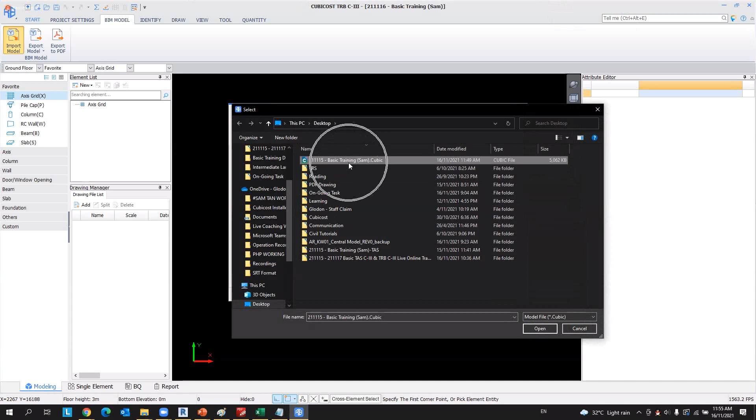We click on the folder icon, and then in the desktop you will need to find this cubic file. Find the cubic file, and then we click on open. Once it will have a prompt stating to you it is completed the resolve model file, and then we click on start.

For the floor height, they have some inconsistency. Every project created in TAS or TRB will have a default 3 floors: foundation, ground floor, and first floor, with a default height of 3 meters in TRB. But in TAS, I have 4 meter, 4 meter, 1.5. Therefore, I need to make sure I use the floor height in TAS.

I need to tick it, tick it. Okay, and then I click on next step.

Click on next steps. And step number 3, we'll be having what floors you want to import, and what elements you want to import with the model. So I will need to select everything, the whole thing. Everything is being selected, and then I click on next step.

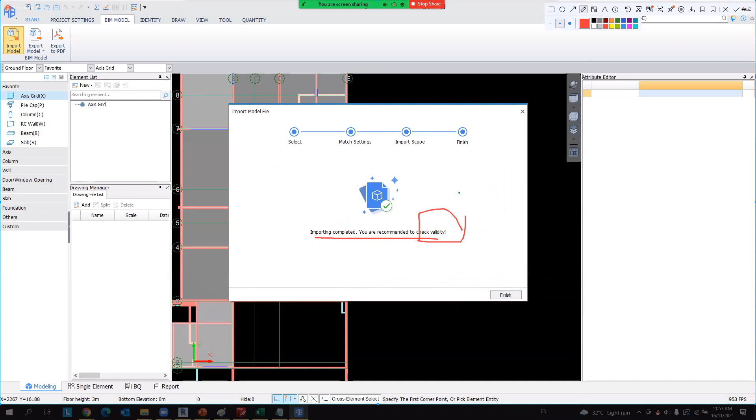So it will need some time to import. There will be a prompt saying importing completed. You are recommended to check the validity - check the validity means it's actually our gap check. It's our gap checking, and then we just click on finish.

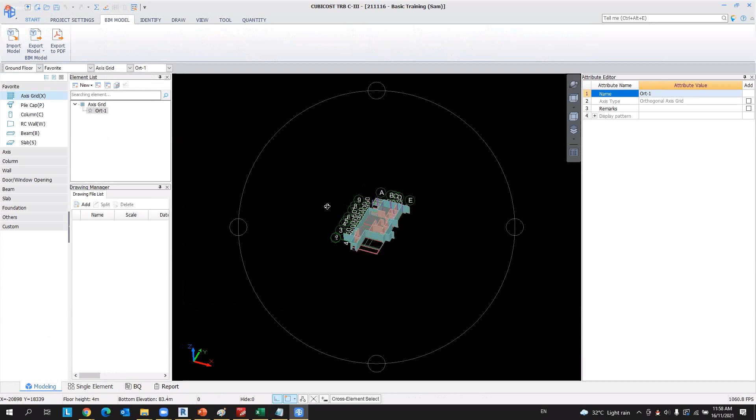You go back to modeling, and then you try to see your 3D, then it will go back to normal like TAS. So bear with us for this minor bug you are currently having for this version. Make sure you go to 2D, back to the single element first, and then back to the modeling. You're able to get your 3D, and the movement is not as big as just now.

And we try to view all floors. So all floor is actually, everything is actually being copied - actually being exported and imported to our TRB. But there are a few things, there are things that are not copied here.

The first thing, the most common thing, will be our finishes. In TRB it's actually to measure the structure elements' reinforcement, so we don't have any architecture. So when you copy it, indirectly the architecture will be eliminated.

So these are the preparation steps. We are not going to repeat the whole step as in TAS at the very beginning - create axis grid line, import drawing, relocate everything, and then draw it one by one, so we can make full use of this information.

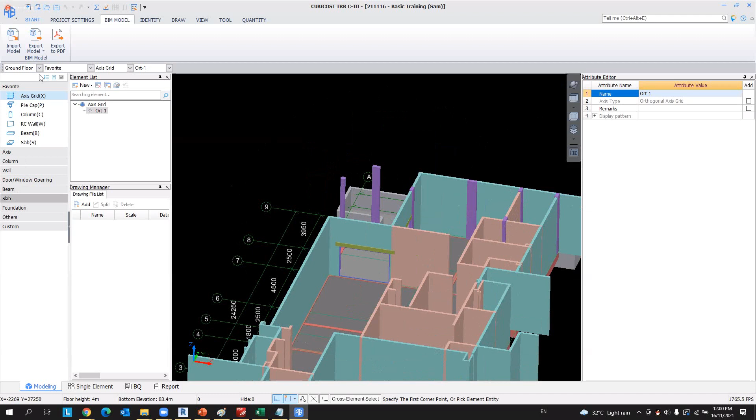So later on, coming back, what we need to do is, for example for column - I have a few items. From here, I will just need to input my information from this attribute editor, and I have the reinforcement bar easily. I will just need to input the information. I don't need to model it out already.

So later, we will have a few elements: pile cap, column, slab, RC wall, and the last part we will have the beam. I'm going to move beam to the last part because we have 4 methods we're going to input for the beam - we're going to focus on the beam in the last part.

So with that, we are considered ready for the TRB when coming back from lunchtime. Make sure you save the file also for the TRB, in my desktop, before you leave for your lunch break. Make sure everything is correct.